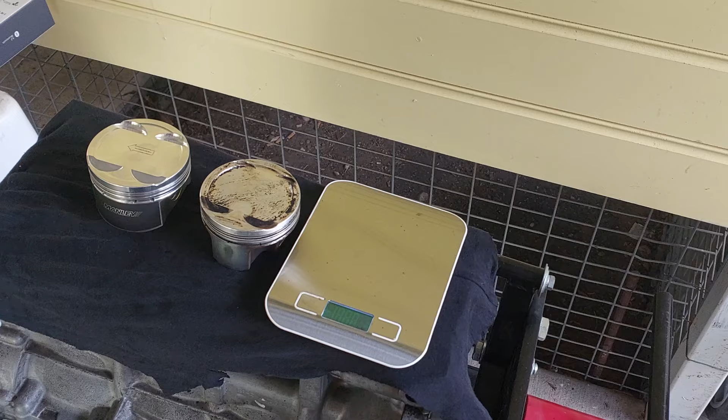So we're going to carry on with our engine build today. Again, don't mind the mess. We don't have the workshop anymore, so we're just going to improvise. We're going to cover pistons today, so I'm not going to bore you guys with too much detail. I just want to get to the details, so we're just going to jump right into that, about choosing pistons for your build. Okay, so we have two pistons here.

This is the old one. This is a JE something. Part number is over there, if you guys can see that. There it's a PN 296904 9277786. These are the ones that were in the engine when I got it. Obviously they didn't make it.

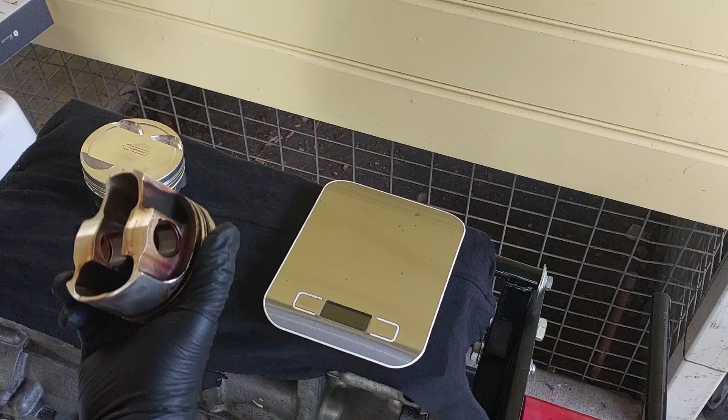I did a whole video on the failure analysis. Long story short, the clearances were not sufficient, and we had all this damage in our bores. I'm not going to go too much into that. So we have now gone with replacing them with new ones. The piston I went with for this build is the Manley 614005C. This is a 2618 piston.

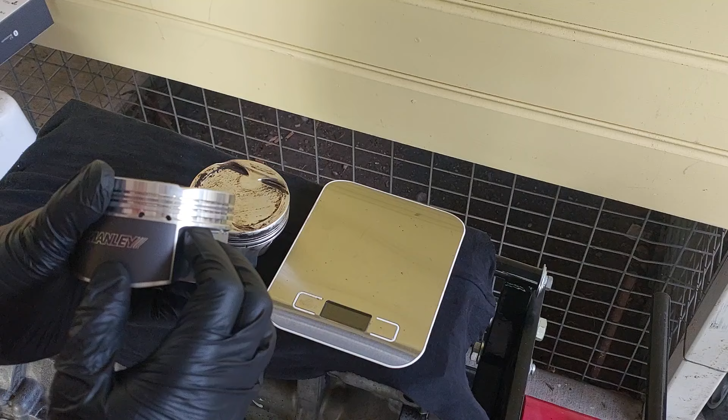The reason for this is we are looking at making more of a power build with this one. We're not really too worried about RPM at this stage, and we're looking for strength and reliability, which is why we chose this one. The actual pistons that I wanted for this were the CP ones. Unfortunately, I couldn't get them, and these were the ones that were available, so I was like, yeah, right, I'll go with them. They're pretty good.

Normally with the Evo builds, or the Evo 10 builds, your go-to is the CPs with the Manley Turbo Tuff rods. If you scout around the forums, that's what most people will say, but it really depends on everyone's personal preference. And we're going to dive into these two a little bit here.

So long story short, you get two types of pistons. The factory ones, which I think are the hypereutectic ones, which is a 4032 metal. I only found one set of those available from Wossner, I think, in the UK. They're the only ones that sell them, so Google those if you want those. They're close to the factory specs. And then you have the other one, which is a 2618, which is this one that I've got here.

It doesn't have the silicon content. We'll get into that in a second. But you will have a lot of thermal expansion on this, which is something you need to take into account when you're building your engine. Same as the ones that are in here. Also, we'll get into how that happened a bit later.

But for applications, if you're going to be building up to power figures of about 500, you probably can get away with a 4032. Reason being, with modern standards, it's not that heavy of a performance application, and you kind of want to get that rigidity. So the reason why I recommend the 4032 is because with your 2618 pistons, you have a lower silicon content.

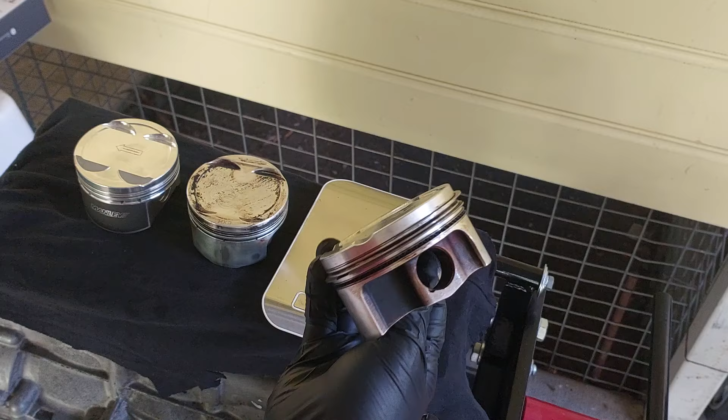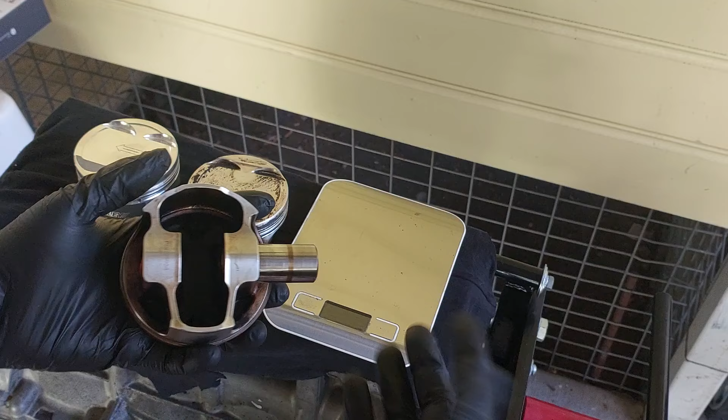So for example, if I can show you this here, these are the old pistons, and this gudgeon pin is stuck in there because it's a relatively cold day. The metal is kind of holding onto that pin, whereas if it was a bit warmer, I could freely turn it as it should be. Now, it should actually be allowed to turn, but that's a topic for another conversation. Yeah, so with the 4032, we've got the higher silicon content, which allows for much tighter tolerances.

Now, initially when I first measured up this engine, I was like, oh, we've got a little bit of damage on the bore here. I'll just try to hone it out a tiny little bit bigger.

And then I would be able to run the 4032s, but the 4032s were so hard to get. Like I said, only Wossner in the UK had them, and obviously getting them all the way to Australia is going to be a bit of a challenge. So we didn't go that route. And then SSM Performance hooked me up with these guys. Very happy with the quality of these ones.

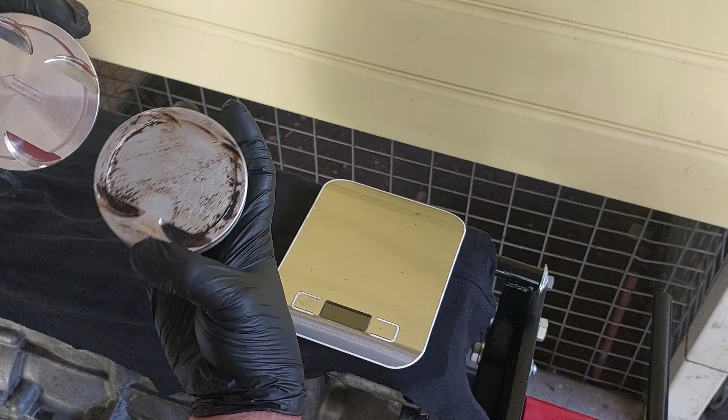We're going to dive into them now to show you the difference, even though they're the same metal and they have the same design. Oh, that's actually the wrong way around. There are differences, as you can see, in your valve clearances here, small things that you want to look into. For the average build, if you're just building something basic, you probably don't have to worry about that. But if you're going for a high performance build, you probably want to look at something like this. Obviously, we're going to push the envelope as much as we can, so we're probably going to end up breaking this engine eventually.

But yeah, it's something I've always wanted to do and document for you guys to learn, for the community and to improve.

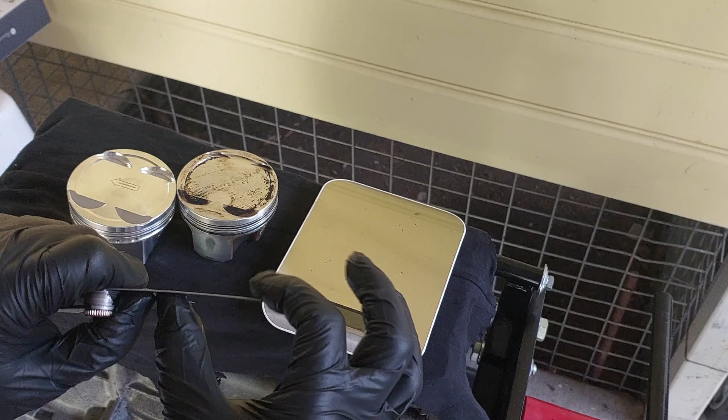So basically if you look at the feeler gauges here, ductility allows for flex. Take the thinner leaves, these two for example. I've got the gloves on now, so they're able to flex a bit easier. It's elastic, but it's going to bounce back. So that's ductility. Whereas a thicker one is a bit more rigid. It still has some of that, but it's not as obvious. Basically, it allows the metal to flex and bend back without permanent deformation, which means it loses its shape. That's why some of the pistons go out of round. They basically deform from that.

So aluminium does have a very low yield. Yield is basically when it starts coming apart and bending and breaking, compared to steel. But due to its lower density to volume, its weight is less. So that's the perfect application we want for automotive. And honestly, if you put the 2618 next to the 4032, they're going to look exactly the same, so you won't really be able to tell the difference. But we went with this one because we have the ductility.

As a compromise, we have to give higher piston to wall clearance, which allows it, as the engine heats up, to expand. You can actually calculate that with, it's not latent heat of vaporization, what was the word again? Basically, you have a coefficient of thermal expansion, I think that's what it's called, which is your material, your ratio, and your diameter. Each one of these has that property, and you can actually calculate what your final bore is going to be.

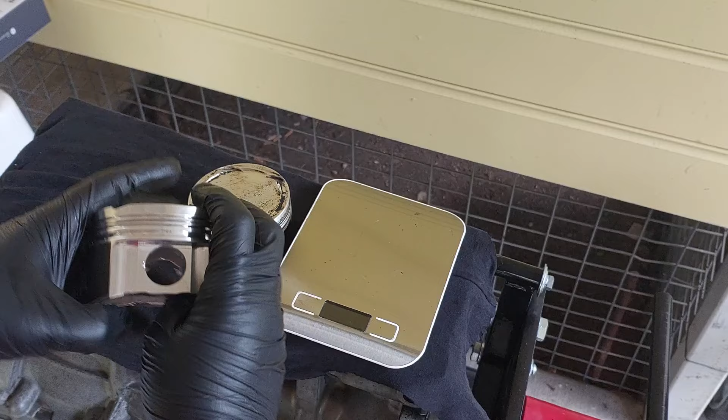Now, keep in mind with your pistons, you have the measuring point. This is actually tapered, like this. Get in frame there, so tapered like that. So your bore will actually be measured somewhere around about there.

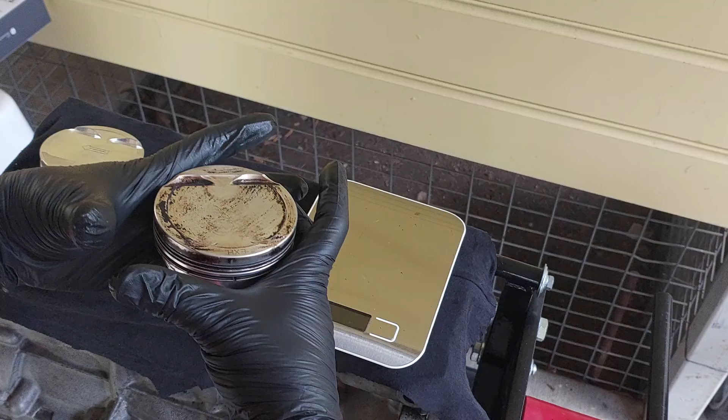They've got a whole thing about that. Now, the mistake that happened with this is that when this engine was previously assembled by the previous owner, they didn't pay any attention to these thermal expansions. That's how this happened, because the piston expanded from the heat, because you have a 2618 now in place of a 4032. So you need greater piston to wall clearances. And then as that expanded, this basically started eating away at the cylinder wall.

You can actually see that. I wonder how close I can get to that without it losing focus. And you can see there, this presses up against the wall of the cylinder, and you can kind of see that taper, how it tapers down at the top. And then you start rubbing against the cylinder. You can even hear the difference there, from there to here. It's just so much louder. So that's the thing, because it didn't account for the increase in thermal expansion.

So how do we fix that? We basically took the block, we rebored it. It was already out of round, so we upsized it anyway. But normally if you want to go factory, you want to upsize it. So let's say the bores weren't out of round, I could have just taken these ones that have been all damaged there, given it a light hone, and dropped in 4032s, and I'm happy to go. So that was the original plan. It didn't work out, so we have to go full rebuild on this.

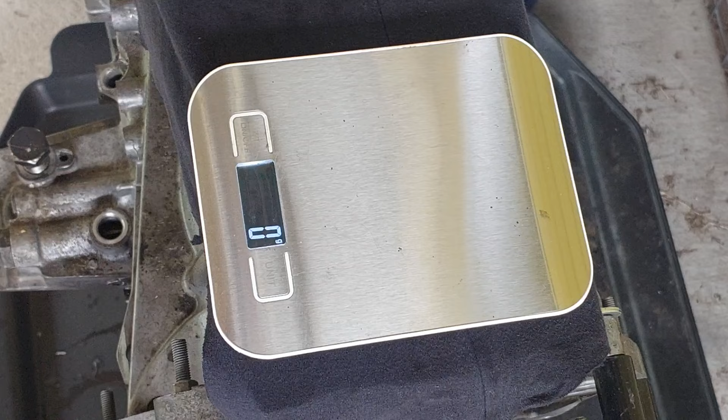And I would like to show you the comparison now between the weights. Is that a 0 there? There we go. Seems pretty good. Okay, so I want to see if you guys can see those figures on that scale. Bugs flying around here. Let me see if I can set this up better quickly. Okay, that is a bit of a precarious position, but I think we got the angle right there.

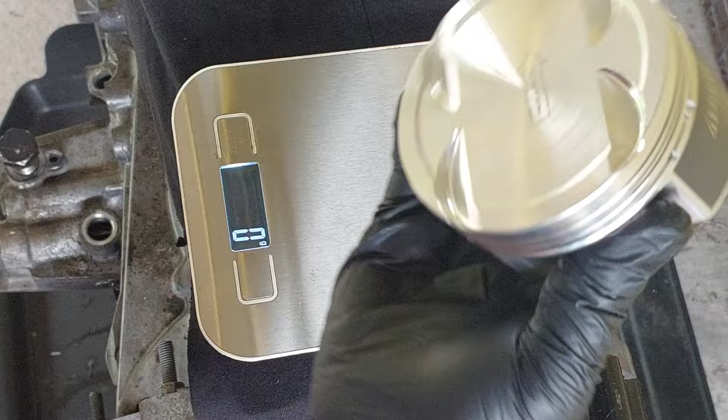So let's look at what we're going to do here. We're just going to measure this. Obviously, we're going to make sure there's no debris on this. Give it a little bit of rag, wipe it off. I probably want to do this on a desk. I don't have a desk because no workshop anymore, but we'll be able to make a flat surface just as good. So we're going to zero that, and let's measure this one. This is pretty much fresh out the box. It comes in at

335 grams, and then comparing it to the old ones here, I think it's a JE's, 317. So this is where the small differences come in, where you have to decide what you want to do. Do you want to go for a high RPM build? Because the heavier you make the piston, the more work the engine has to do to get the piston up and then pull it back down. The more weight you have, the slower your RPM response. But obviously if you have a lot of boost, you need that strength.

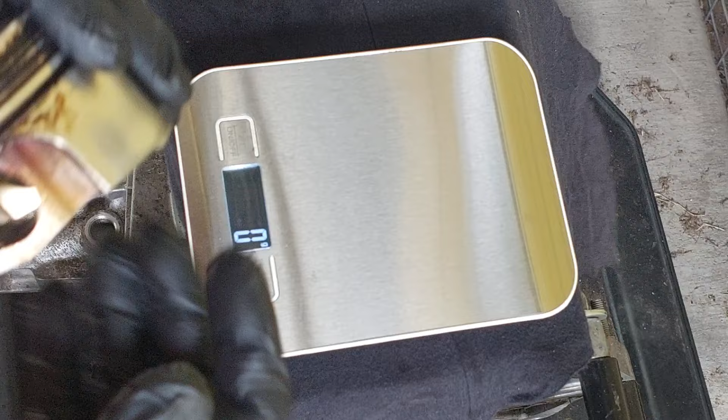So basically, the more mass you have, normally the stronger your piston is. The less mass you have, I wouldn't say it's weaker, but if you don't have as much support, it's not going to last as long. And obviously with the balancing, it's a whole thing.

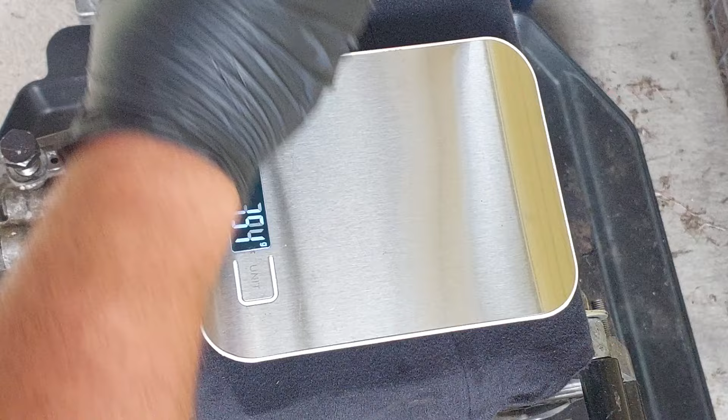354, 353, 353, it should be 354, come on, 353, okay, so that differs. So what are we going to do with the weights now, because the weights are obviously different? If you're just running with normal applications, like I said, sub 500, you probably don't have to worry about this.

I'm a little bit of a perfectionist; it kind of annoys me when it's there, so I want them to be perfect. So what can we do? We can basically balance these with the gudgeon pins. So if we take these gudgeon pins over here, or wrist pins, or whatever they call them depending on where you are around the world. And again, obviously wearing our nitrile gloves, because the oils and things on your hand will make these things corrode, so you don't want to do that.

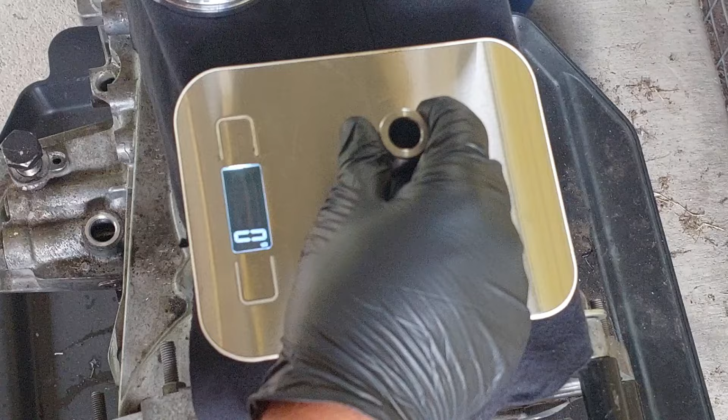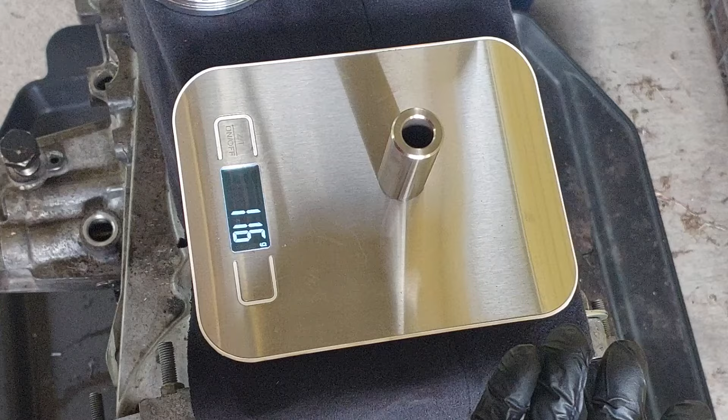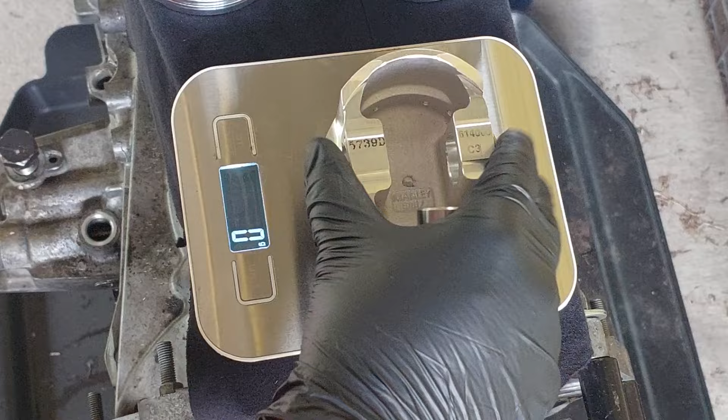So let's measure these out. 117, 115, 114, 115. So you probably want to measure these a few times. You can actually match these weights with the pistons to get your similar weights together. So 116, I think this was the 113, I think it was 354, right? So you want to weigh them about 3 times so you get a good average. 353, because nothing is really perfect these days. 353. So if we put that one in, we'll go up to 471.

Let's have a look at this one. 353, 468. Let's see if I can get another one there. 468. So let's see if I can play around with this a bit, get a bit closer. 470. So let's go with 470 on that one. Try and get them all to 470. That's 470 right there. And this guy here, 470. And then if I have done this correctly, hopefully, come on, 470. Here we go.

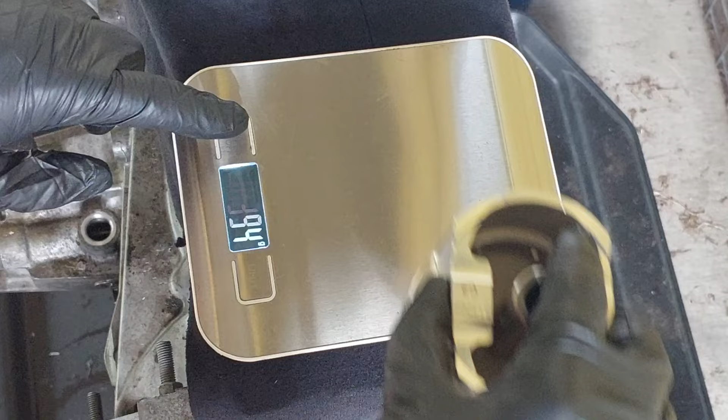It's a bit lighter. Let's just measure that a few times. Well, let's zero the scale again, because you always got to work with the weight of your lightest piston. And yes, there's a bit also. Obviously, with this being lighter, we're going to try and make this one heavier because we want to get that 470 there. Either that or we have to take everything down to 469. So let me quickly mess around with 469. There we go. We've got 469 over there.

We had 470, so this is too heavy, that's too light, so we'll swap these two gudgeon pins and then give that a check again. So 469, 470, so this one's a bit heavier now, and then that should be 469. Come on, 469. There we go, right. So now instead of having to bring down the weight of 3 different pistons, we just have to basically take this one and drop it down. Let's get this thing properly weighed. So we're a gram over, so we can take that off with a little bit of effort.

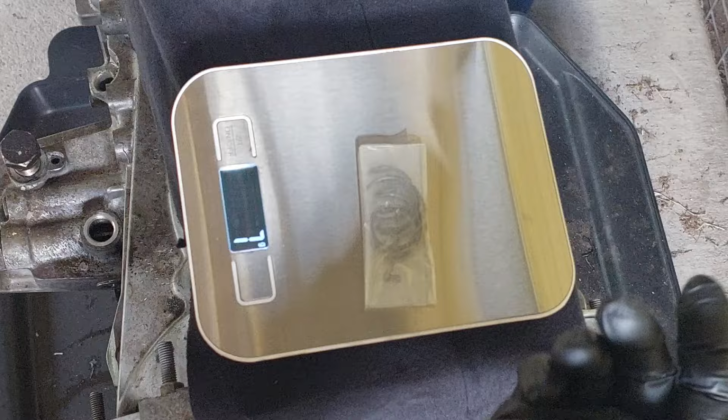Now there's still another trick we can do. We can still use our wrist pins. Wrist pins, what am I saying? Circlips. So they come to a total of 7 grams, so we'll probably get a bit of weight there. And then obviously our piston rings, we still got a few grams there we can play around with, which is basically how we're going to go about balancing things. So that covers the basics of the pistons, the metals to use, and obviously the weight, which we want to take into account.

So let's compare these to the old ones. Here we have one with the wrist pin and the rings. I can't do the other with the wrist pin and rings because it's empty. This is the bare one. So let's compare this one here with its wrist pin. So that's about 423 grams on this side compared to 468. So 468 versus 420. Is my math correct? Yes, about 40 grams. So 40 times 4 is 160 grams of weight more added on here. And that just gives you the idea of what we're working with here.

So interesting thing here, if you look at this one here, it's 101 grams. This one here comes in at 115, and you can just see that cross-sectional area. So the cross-sectional area here is a lot bigger than that one, so this pin is going to be a lot stronger. And mind you, these things are very similar in pricing. So it really does depend. If you want to have high revs, run like an H-beam setup and a naturally aspirated engine, you probably want to go with these JE pistons. If you want to go for strength and reliability, you probably want to go with something a bit higher.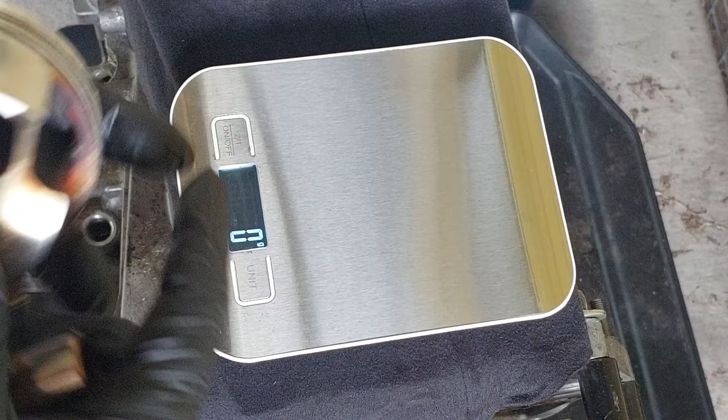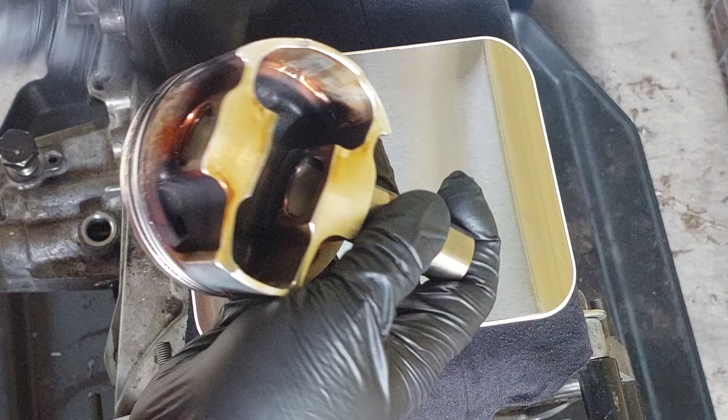Yeah, these ones are still a little bit cold, because the damn flipping snap ring is in there. Yeah, righto. So yeah, slightly getting there. So as you can see, it's a bit tight. Now, interesting thing, if you have your assemblies that you're running and suddenly your wrist pins can't slide in and out, it does point to deformation on this, which means that's one sign you can look at to determine if you are getting any deformation, like the piston's basically losing its shape.

So that's basically the section there. I'm not going to bore you guys with too many details, but that's basically what it comes down to. We've just done pistons on this. We haven't even done the rods yet, so I'll probably make that in a second video. So let's look at our bores and how we're basically going to do this. Let me get that set up.

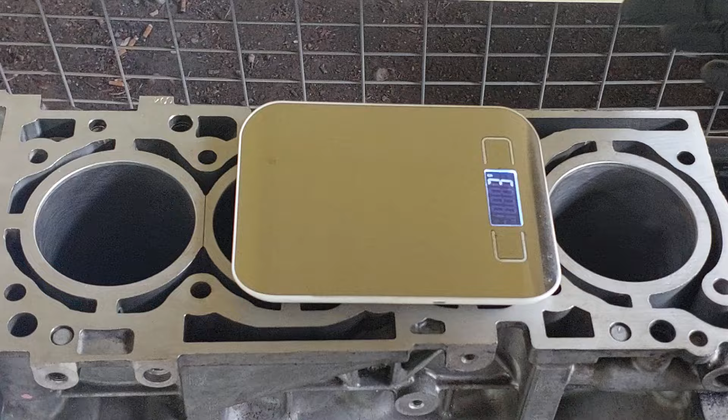Okay, so here we have our little setup. Camera's kind of hanging by face, so just bear with me, guys. I just want to point out one thing that I also noticed. Just going to drop it on the scale. If you guys can see the figures there. Yeah, you can see the figures here. That's close enough. I'm going to zero that. And then looking with the old piston setups with the gudgeon pins. 446 on that one. That one there, 446. I think this one here was over, like 440.

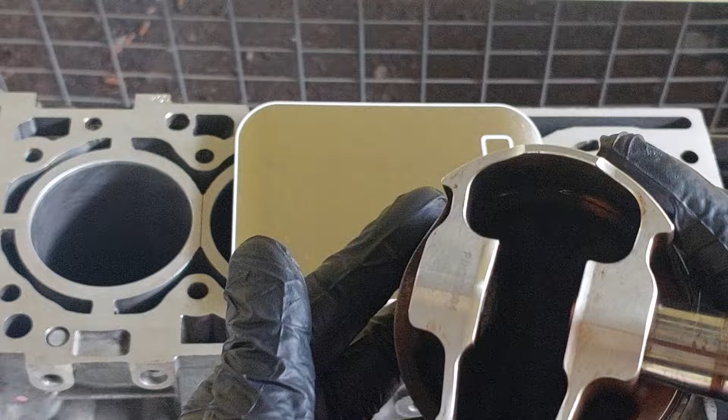445. And if you look at the areas where you would remove mass on the pistons, no effort was made to balance these pistons at all. There are no marks on the gudgeon pins. None of them have been balanced. So they just basically took these, slapped them on, sent it, which is fine if you're doing like a Honda and you want to get VTEC to kick in, but not when you're building an Evo.

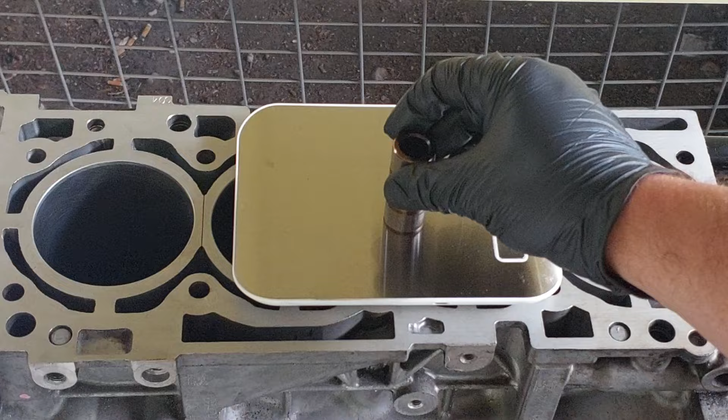See, that's 105. The other pin was 101. They really are not the same. There was a lot of play here, and they just didn't run it accordingly. I don't know who the guy was that built it, but it's those little things that basically get your engine to run better than the other guy.

Okay, so now we have a bit of a rainstorm coming in. Might have to redo this video. Still thinking about it. But yeah.

So next thing we've got to do is check that our bore clearances are correct. Our pistons will basically heat up and expand, and it's never going to look this nice again once you have it in the engine, so enjoy the pretty parts while they're there. I'm not going to drop it in because there's nothing at the bottom, but as our piston goes in, you can see we have a lot of play there. That's your thermal expansion, and we need to check that our piston rings are going to seal properly.

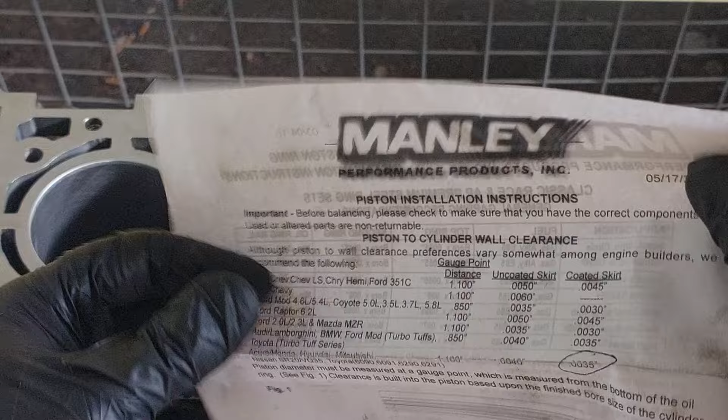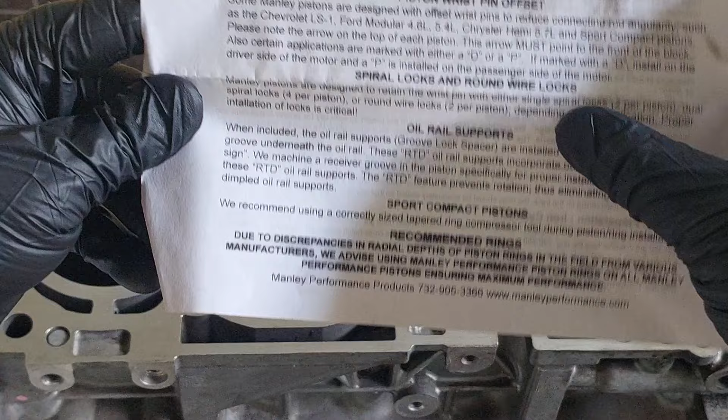So very nice of Manley to supply us with this information. If you get your proper OEM things, you get a paper from the manufacturer, and we're basically looking at our specs here. It gives you all the details you need of the pistons, all your oil ring rail supports, your sport compact pistons, and everything you need to know is there. Pretty good information.

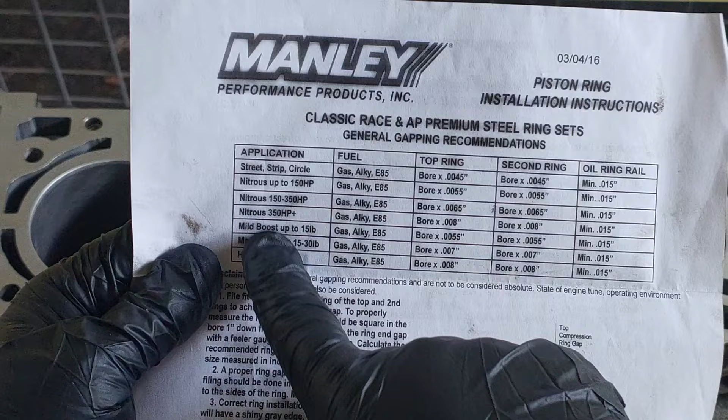Interesting here to look at is the fuels you're trying to run. You have your high-risk applications, nitrous, street, all that other stuff. I don't want to put nitrous on my car, so we're not going to look at that. But you have your fuel, gas, alky, E85, and then you have your bore times ring gap. Now this is in inches, so it's a good idea to get used to working in inches. We had to rebore this block, right? So we basically factored in our ring gap. Here they even have a little chart with all ring gaps and top ring compression. I disagree with this.

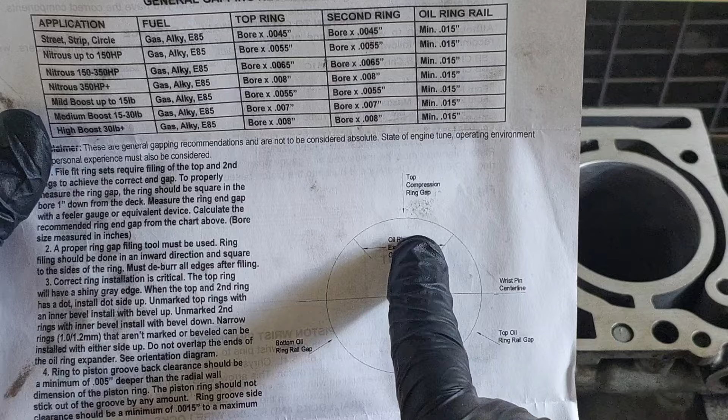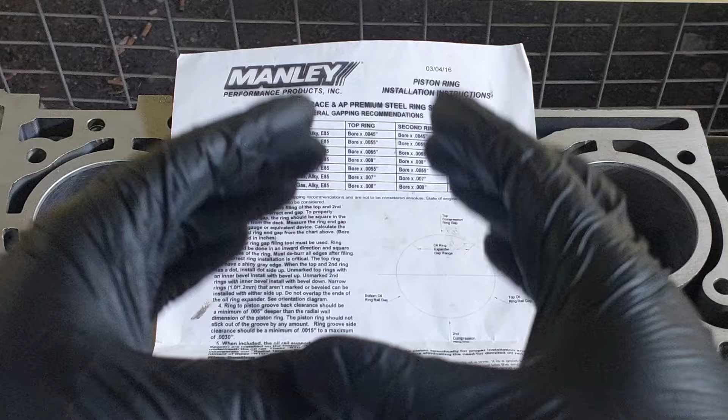Reason being is that is on a working surface. So you've got your wrist pin, which is going to run... wrist pin on that. So exhaust is that side. So your wrist pin's going to run like that, and your top ring gap is going to be there. Now I disagree with that. Reason being is that is a working surface. So as your ring is going to walk up and down, the ring is going to kind of press out every time you do. So as it presses out, you got your gap coming through there,

and we were trained to have it almost like a Mercedes logo. It's like here, there, and there. So you have your areas just there, but slightly to the right. So you don't have that constant ring gap eating away at that surface with the expansion, which probably some guys say it's better that way because you want the ring to set out and seal better.

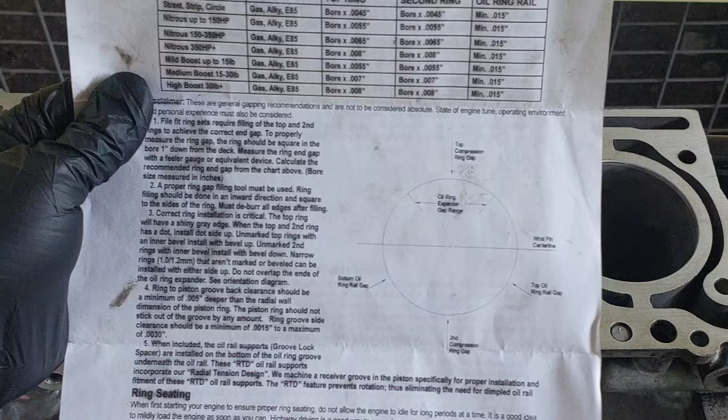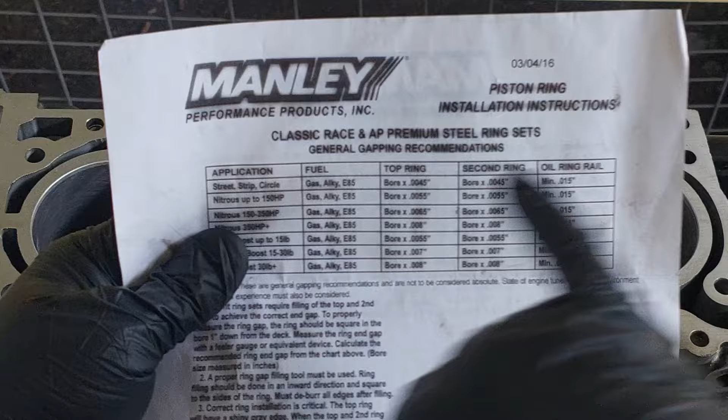Personally, I just think that's going to wear out my engine. I've never done it that way over all the 20 odd years I've been working on engines. So we're not going to be doing it that way. But anyway, when in doubt, RTFM is always a good choice to go to. So what I want to show you, top ring gap, we're going to be looking at high boost applications, 0.008 of an inch. So you take your bore in inches times 0.008 and you get your reading. So same there, same there, same there. And then we're going to work with that.

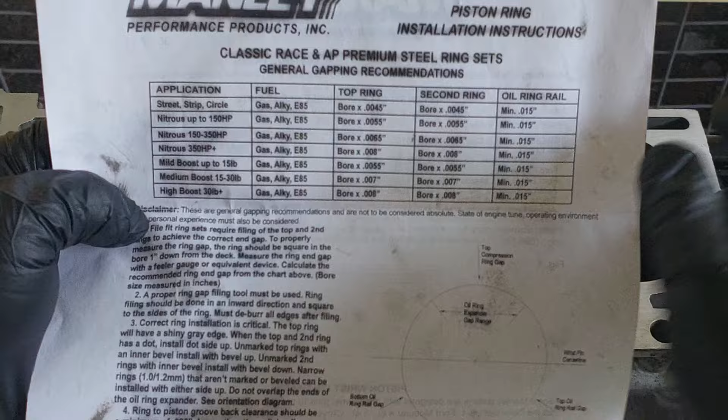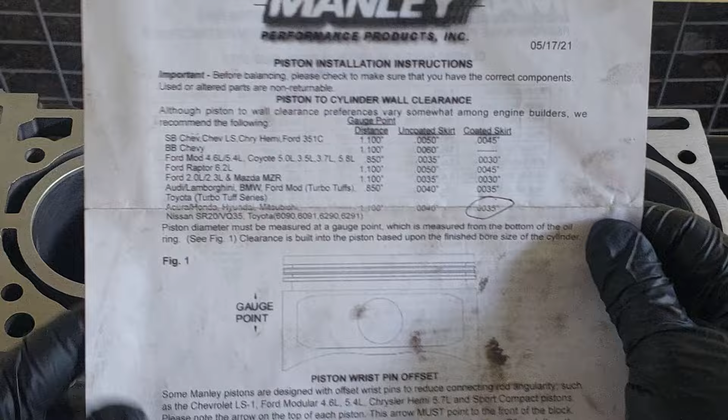So we know our bore is 86.5. And talking about that, we're going to know what our ring gap is. So this is the ring set, right? Fuel top ring there. Here we go. And then this is our coated skirt with the bore. So same thing with the bore. If you wanted to bore this, we want to go 86.5. We need to have that tolerance on there. So we're going to have 86.5 times 0.0035. Can't remember what the math was, but we're going to check that now. So we're going to get our micrometer set. So let me get that set up quickly.

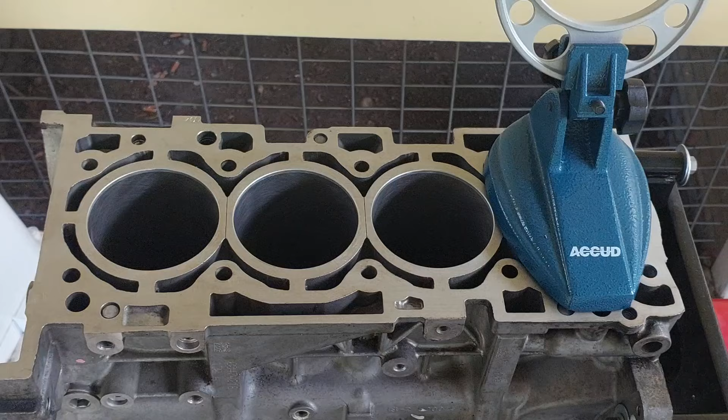Okay, so just for demonstration purposes, we're going to use the surface here. Don't work on top of your engine. Use a desk. This is just for educational purposes to show you guys in a more convenient way, without the camera fluctuating all over the place, how we're going to assemble this. So we're going to get our micrometer set out. We're going to get our telescopic gauges out. I'm going to go with this guy, which is 92. So that's a little bit too big. We're going to go with these ones because we want to check 86.5. I have a little telescopic gauge here. Quite fun little things to play with.

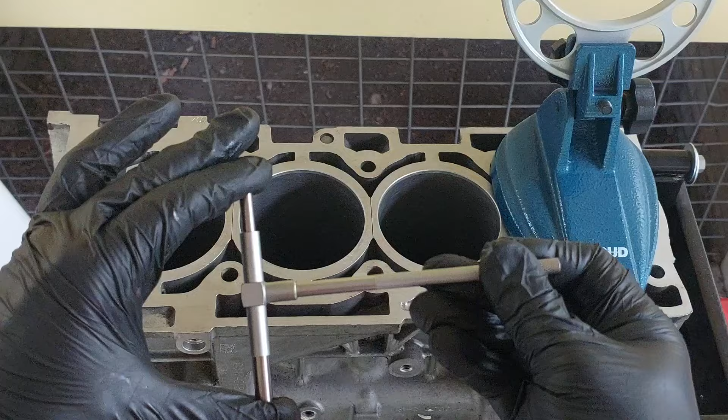And put that in a safe location so we don't knock it over and damage our reading, and then we're going to measure our bore. So how these things basically work: we tension over here, pressure gets applied there. It's a little bit clunky today. Anyway, we're basically just going to pull her in just underneath the bore, tightly nip it, slow her down on the bore, release it, and then nip it again, and at this same angle, pull right across there. That is our dimension. Hold it in tight, go to our little micrometer here.

So let me set that up. Micrometer has been properly set to 0, and we're going to take it out to our dimension here. Gotta be really careful I don't scratch my surface here. I'm gonna do it that way. So I know it's gonna be around about 86 something. So obviously this was done by an engineer, so they've got a lot better equipment than I have. Just for demonstration purposes, so you guys can see how it's done. I still don't have any good method to rebore a cylinder at home, but that's basically what we're gonna look at. And we're just gonna tighten that in.

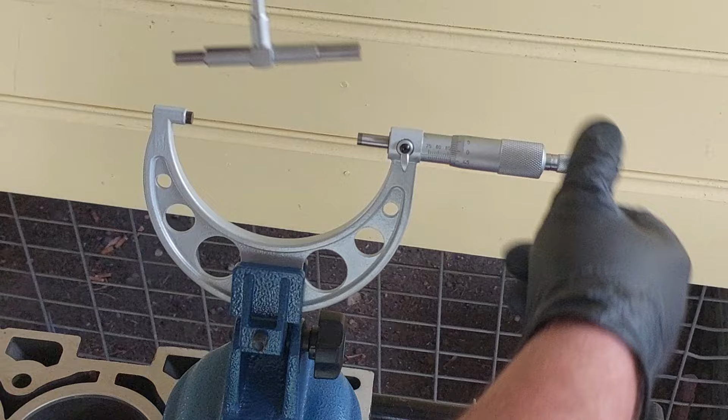So we're going to unlock that, move it back, put it back in. My hands are really shaky today. And it is exactly the same dimension as we had before. So that 0.04 discrepancy I have is probably just my lack of measuring skills. I'll just measure that again. So we want to get an average of 3 times.

I hope you guys aren't too much distracted by the airplane in the background. It's been hard to get these videos done because every day there's just something that needs attention.

But yeah, so basically what do we do here? So we're checking our bore dimension like that and like that. And obviously it's a new bore, it's just been honed, so it's going to be correct to spec. Be careful if you want to do it like this, because your piston's going to wear along, because your piston rocks around that axis, so it's going to be wearing those surfaces.

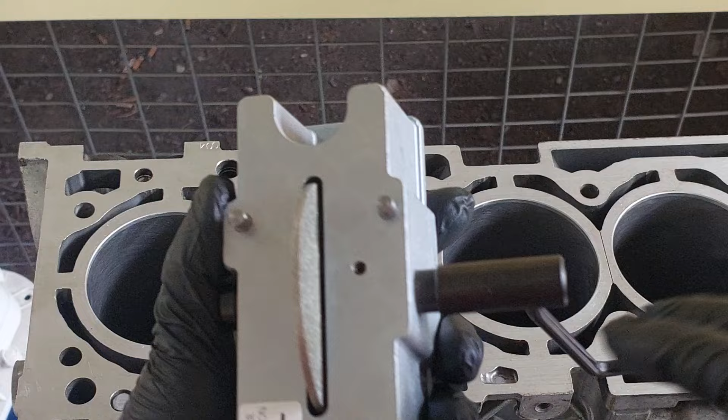And then I think there's one more thing we've got to do, which is basically our piston ring file. So we had that little calculation with the gap, so we're going to quickly show you the piston ring file. This is our ring file that we're going to use. You have little dots there, ring goes on there, and you grind it. Now it says direction of rotation this way. I disagree with that, because... where's the ring that I had? Let me get that quickly and I'll show you a demonstration of why.

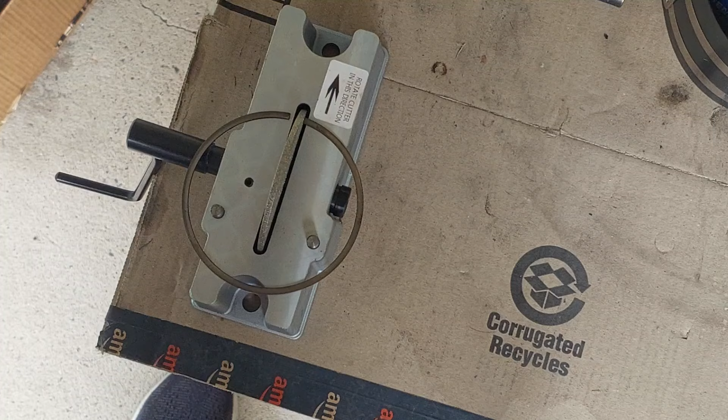Okay, so trying on the overhead camera here, hopefully I don't drop the camera. So with the disc rotating in this direction, it does work if it goes on that end. However, you have no control over the angle here, so you want to keep it in this area here, but that's this side of the axis. So if you do that, the piston ring is going to lift up, especially if you do it over here. See, it's over there. So if you run it in this direction, this is actually going to unscrew. So it just does not make sense.

Whereas if you were to go the other way, this is your direction of application, your piston ring is not going to be lifted up. So let's see if I can get a better angle on that to show you a bit more. Let's just have a look at that center. So you would basically hold this in this position, gently working on it. This is a 220 grit, so it's going to take it down quite a bit.

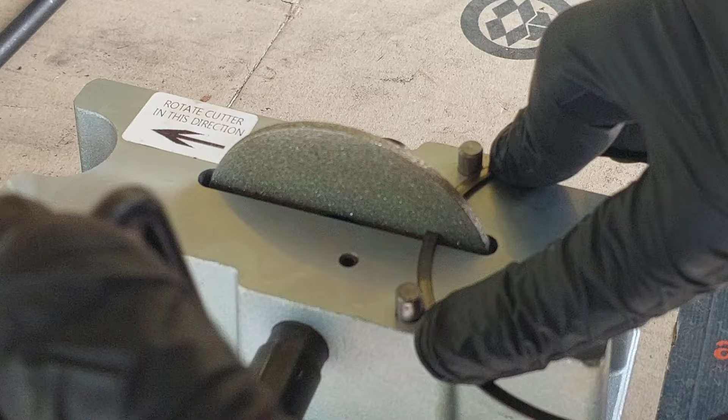You can actually see it, just hold this here properly. You can see it basically lifts the ring. See how it lifts that ring? That's why you want to go the other way. See how stable the ring is there now? See if I can zoom in a little bit more.

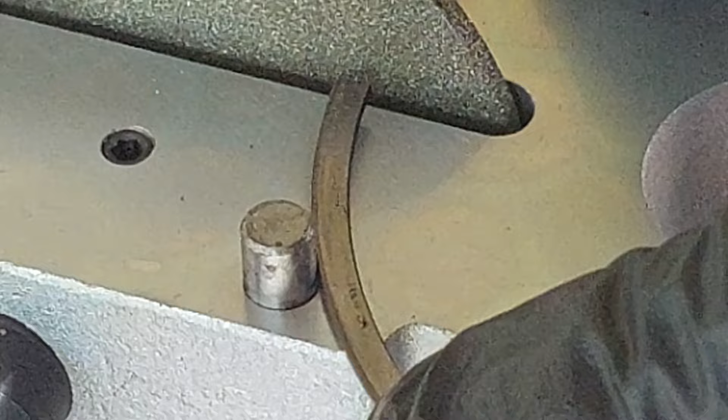Okay, right, so if I do that, sorry for the shaky camera, and I hold it here in this position. Now watch what happens with the tip of the ring if I go in the direction of grinding. See how it's moving up? And if you go the other way, it stays nice and... this is the old ring, just to clarify, it's not the new ring. But basically you would have that grinding mix.

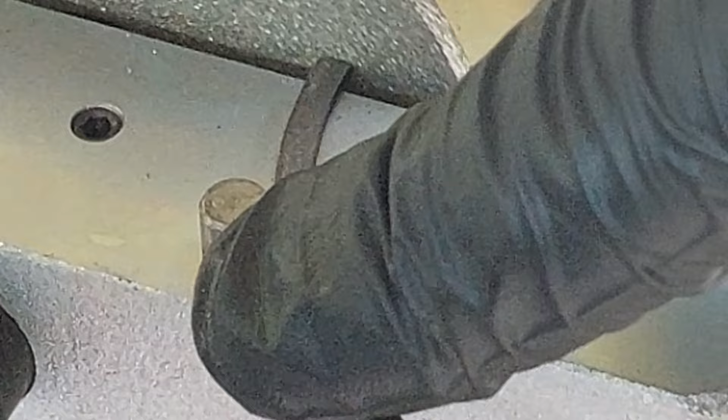And you don't want to push it, just gently. I'm basically applying just a few finger pressures. I don't know what a finger pressure is, but basically that, just gently working it down. And if you do it the other way, you'll be able to see there that it actually has an uplifted end. See how it's not square anymore?

If you compare the two to the side, look how that edge is almost shiny at the top, and that one's nice and square. See that shiny little corner there? That little stuff is going to affect your build. It's not going to run the way it's supposed to. So yeah, we're going to be doing the piston rings the other way.

Okay, then just here for demonstration purposes on cylinder number 4, we're going to take one of our kits. So let's put this away here and grab our new piston ring set. I have one already open, which I placed. Let me just allocate that quickly. Okay, so we have our nice new set of Mahle rings over here. There's the part number if you ever want to get some Mahle rings. And then we have our ring set.

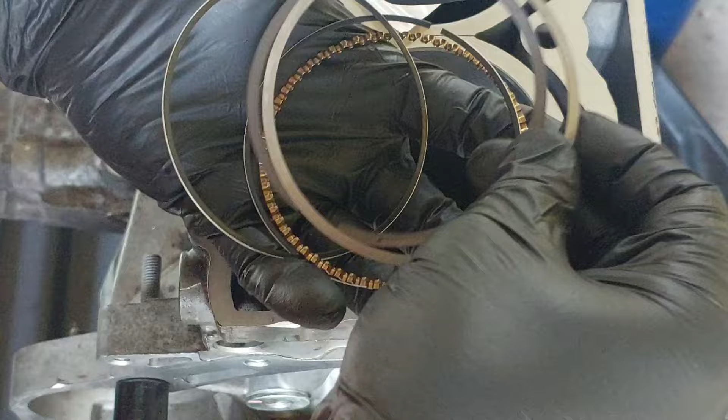So here we have our, that's the bottom ring, that's the top ring. Those are our oil rings. I'm not really too worried about the oil rings. They're not really that hectic, but the compression rings definitely are. I will definitely be looking into these because one of my older engines did have an oil ring come loose. But these are less of a concern than the other ones. So I'm just going to put that back in the packet there, make sure they don't get oxidized or anything.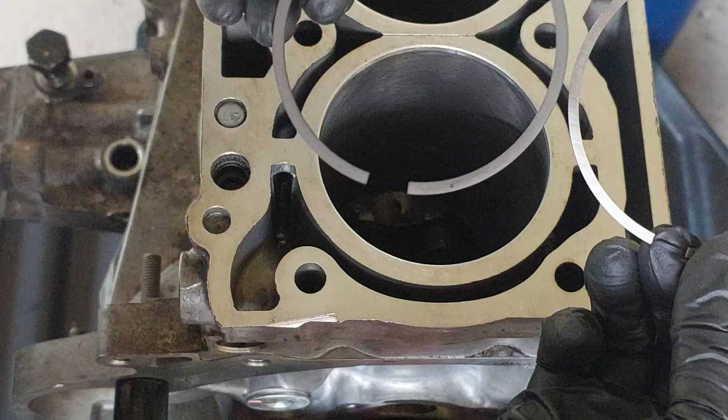Yeah, so 2 different ring types. Normally your second ring is a bit bigger. If we were to compare them, see your top second ring is a bit bigger and the other one's a bit smaller, and normally the little dot is what indicates the top side of the ring, but you do want to do RFM on that. Read the freaking manual basically, if you guys don't know what RFM means, and make sure that you have your correct gap.

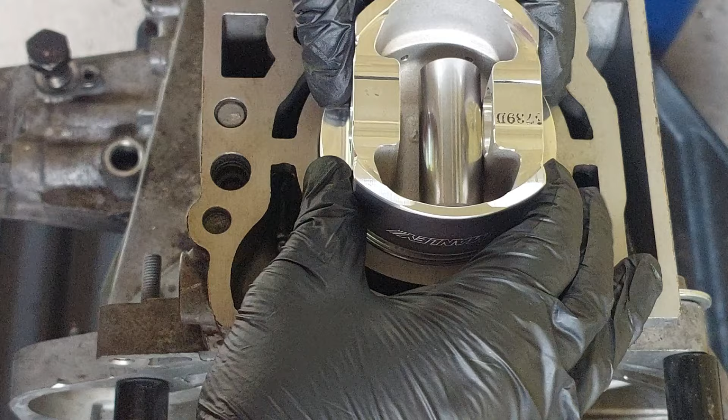So we're just going to use our top compression ring gap at this stage, and we're just going to stick her in there in our bore again while we haven't assembled the pistons yet, and then just use our nice little Manley piston over here, get it down just a little bit, and that is the most accurate way, I guess, to get them down. You want to get it just down to the side there so it's flush. You don't want to put it in too deep, but you also don't want to leave it at the top. So we're going to get our feeler gauge and quickly check what that dimension is.

Okay, so we have our feeler gauge here. I've just moved the gap a little bit there so you guys can see what I'm doing. And we're just going to take this ring gap, slip it in there, and it just fitted. It's not fitting. Oh, there we go. Fits nicely in there, and that's going to have a nice firm feeling. It's not tight. You're not forcing it in. The ring kind of moved there a little bit. Let me just readjust that.

Those are inches. Those are millimeters. And let's just go one size up. This is just like a low-tech feeler gauge that I'm using here. And let's see, so we want to go one size bigger. Let me just get that quickly. Okay, so I've got 3 sizes here.

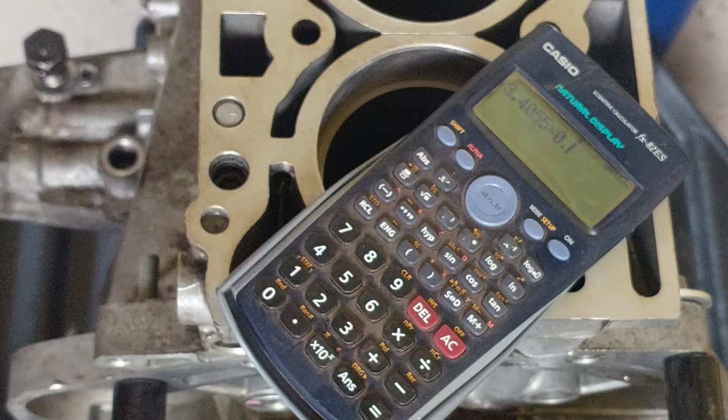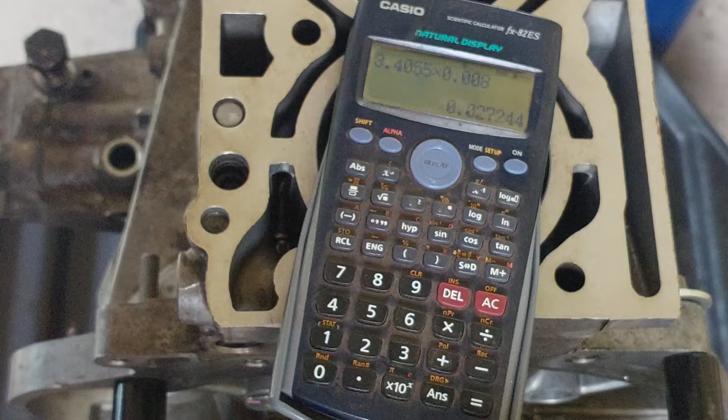So 86.5 millimeters is 3.4055. So we're gonna multiply that by 0. What was the dimension again? Let me just check that. Measure twice, cut once. Put the paper over here. All right, so we have our gauge there. Second ring, 0.008 inches. That gives us a dimension of 0.027 inches. Right, so that is going to be our ring gap.

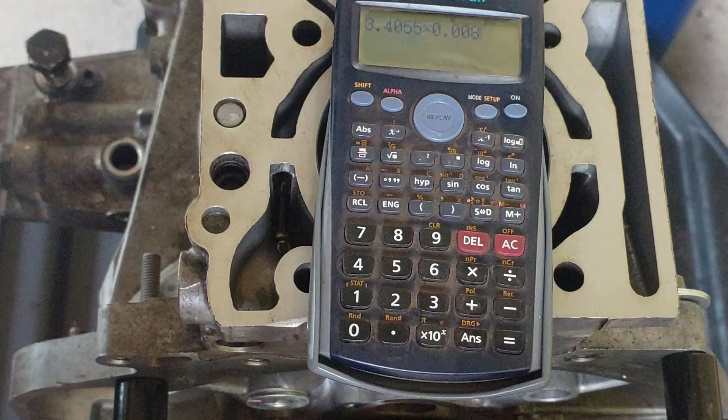So let's grab this piston ring over here. So as the engine heats up, your metal's going to expand. So we want to make sure that that gap there is going to be good. So if we were to grab our little feeler gauge here again, go down to 0.027 inches. So 1, 10, 25, 28. Do I not have a 27? Oh, that's a bit unfortunate. So 28 is going to be too big.

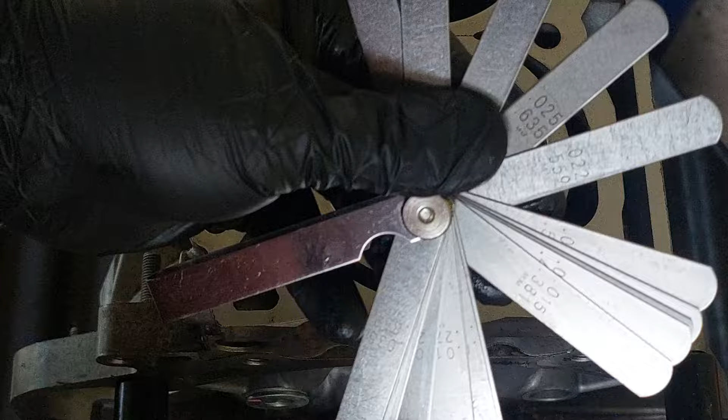So let's see here if we can get 27 in another way. So if we had 15 and 12, we can do it that way. That's 14, 13, 12. There we go. So we can add our 0.15 feeler gauge with our 0.12, add those together, you get 27, and that's going to have to be the thickness of our ring gap. And as you can see, currently she ain't gonna fit, not at all.

And this is the part where you want to work it down and measure it a bit. So we're going to work this one down quickly to this dimension. Let me get that set up for you guys. Okay, this video is getting a little bit long, so I don't want to waste too much time on this here. So we're first going to work down a little bit on the one side and then the other side using these two pins as our positioning, because like I said, we're about half of what we need to be in terms of thermal expansion.

So we're going to work this down a little bit. Be careful when you do this, because once you take it down too far, she's gone. You got to get a new set. Well, I don't think you have to get a whole new set, but that's what the manufacturer recommends. So we're going to work this down a little bit, gently working it in, holding it in place, working it down slowly. This would be better if it was stuck to the bench. So we're going to hold that there, keeping the pins against that one at all times, keeping it nice, flush and level.

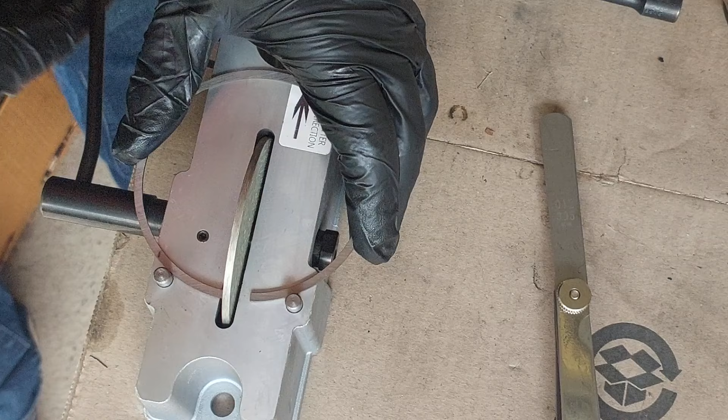I'm actually being stupid, I've got to do it this way. Yeah, there we go. So again, with that rotation, look how much easier that is compared to the other direction. Just gently going to work it down. Other side, gently work it down.

And then we're going to stop there, and we're going to check again. Again, we're here at the ones, so we're going to slip this in. Today is getting a bit long, so I think I might have to cut off this one here because I've got a lot of things to do. It's about 8 rings. Drop that down there.

Correct length. Get our feeler gauge. Set up to the correct dimensions. Double check. Measure twice, cut once. And check our ring gap on there. And she's still not there. So we can actually now take our other blades and say, well, that's 22. So let's maybe check a 20. And then work on there.

So okay, well, if we get to 20, we're going to be close. So we're going to work on there. 20 is not there yet, and then we're going to work it down to, I think it was 15. Yeah, there's a 15. And we're going to work it in there again and see. Okay, well, 15 still is good, and you'll kind of get the feel of how far you still have to go. As you can see, we haven't really gone very far because I don't want to overgrind these things, because it took me bloody 3 months to get them.

Right guys, so I'm going to call it there. The video's getting long. There are some more things we probably want to do with the pistons, but that covers your basics. We covered the metallurgy of the pistons. Let's get a better view here. Alright guys, so I'm pretty much going to finish it up there. That's everything you need to know. We will be doing our rods next, and I'll cover everything in depth on what we need to do with these ones. So these are going to be our next rods. We're going to be comparing them to old ones, look at metallurgy. We're going to cover the inertials on these things, and H-beam versus I-beam and all those other things.

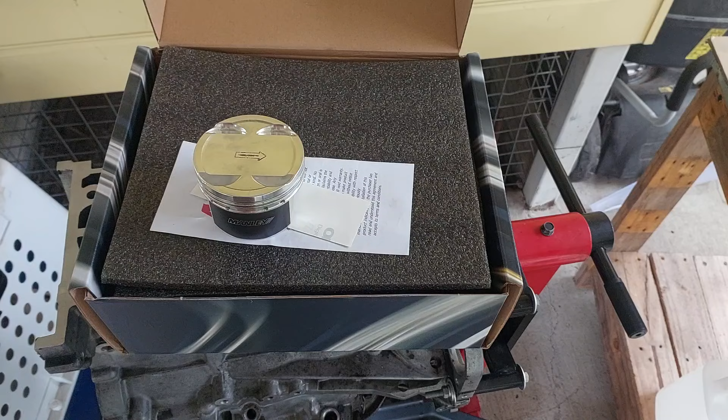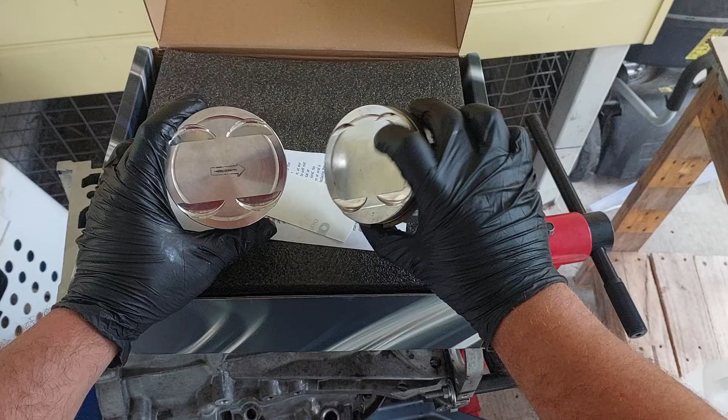So in the future, oh, I can even see the future work marks there. So yeah, in the future we're probably going to do a lot more things. Obviously I do need to get this car done, and filming things does take quite a bit of time, so we're probably going to be speeding things along.

But yeah, so that covers everything of our pistons, our 2618 high revving pistons versus low revving pistons. You can even see some machining marks there. So even though they're exactly the same, they're not made equal. And also just look, we haven't even touched on that, but basically your valve clearances here are obviously more important. So these are normally run by people with cams, bigger valves and things, so you need that little more spacing. And yes, we've covered the weight, we've covered the balancing, we've covered the metallurgy. I haven't covered the skirt sizes here, but obviously it's for different applications.

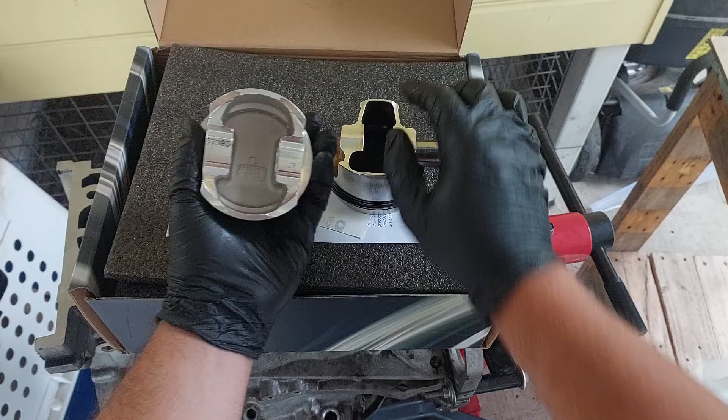So with your exhaust side being, which side? Exhaust that side, yeah. So if the exhaust side is that side, and your intake side is here, you obviously have a cooler side, you have less weight. You can see the cross-sectional area, the difference in shape there, where this is a more triangular shape, where this is a more square, strong. You can see your cross-section here is a lot bigger, thicker, a lot wider there, your gudgeon pins are bigger. So at least that gives you guys an idea of what to look for in terms of quality in pistons. I really hope this helps anyone with the engine builds and projects that you're working on.